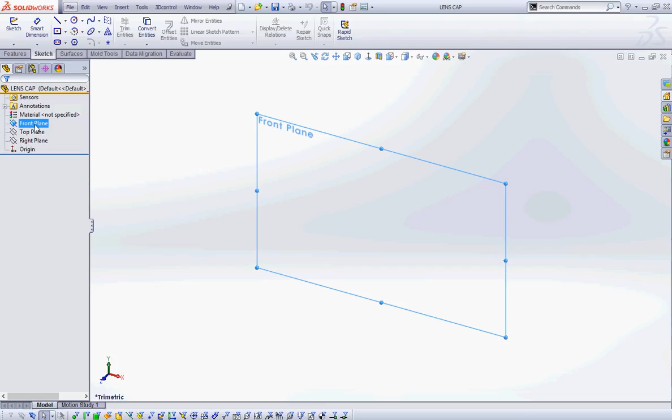Going to start with a circle, center point coincident with the origin. And the dimension is going to be 4.9.

Anybody lost, needing help? Anybody needing help at this point? Ron's sitting back there waiting for somebody to need his assistance. Don't worry, it's all good.

Okay, so now we're going to do an extruded boss base. We're moving over to features, doing an extruded boss base, but we're going to give it a draft so it looks kind of like a drum. I'm on the middle of page 5-22.

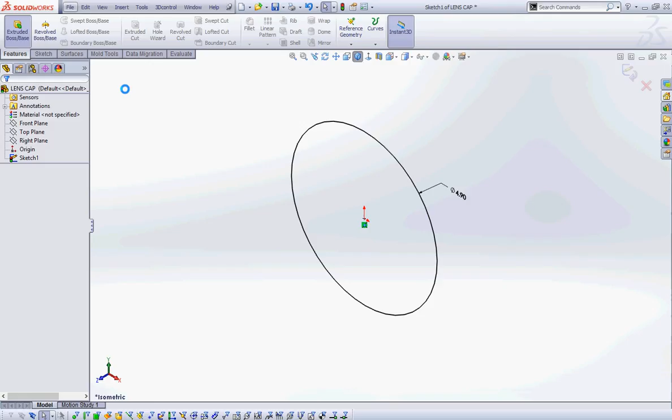Okay, so I'm going to extrude it 1.725. I'm going to add a draft. My draft is going to be 5 degrees. And I'm going to put a check right there where it says draft outward.

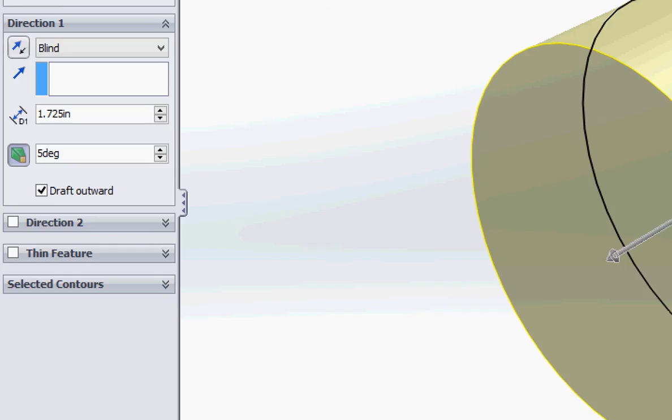Green check. Anybody lost? Needing help?

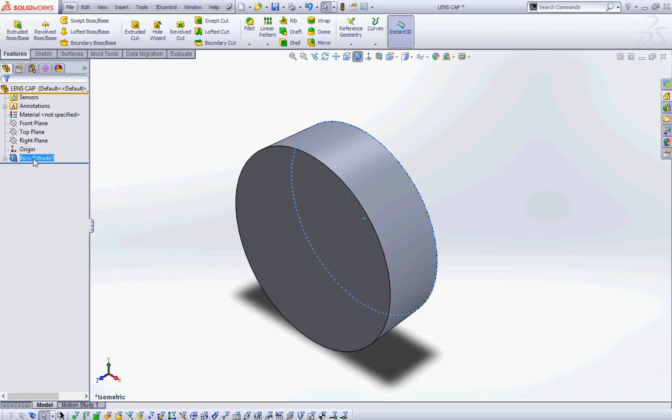Oh, I needed to reverse the direction. Sorry, I need to reverse the direction. I need to have it go toward the rear instead of the front. So I'm going to come over and edit the feature and change the direction right here, so that the small end is at the front and the bigger end is toward the rear.

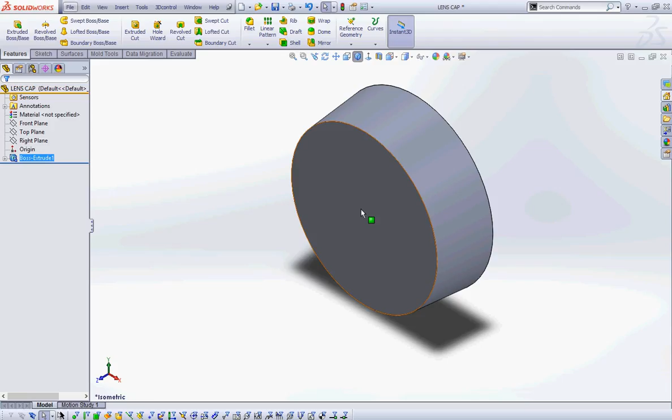Do you remember when we created the battery and we created kind of a well for the terminals? We're going to do the same thing here. We're going to select this front face for a new sketch, and we're going to do a circle.

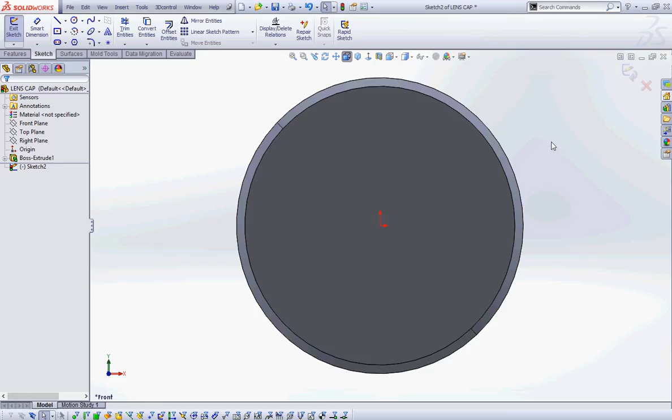And we're going to add a dimension of 3.875. Now some of you might be concerned because it says 3.88 instead of 3.875. That's because I only have 2 decimal places and it's going to round up. All right?

Anybody need help with the second sketch? Okay, moving over to features.

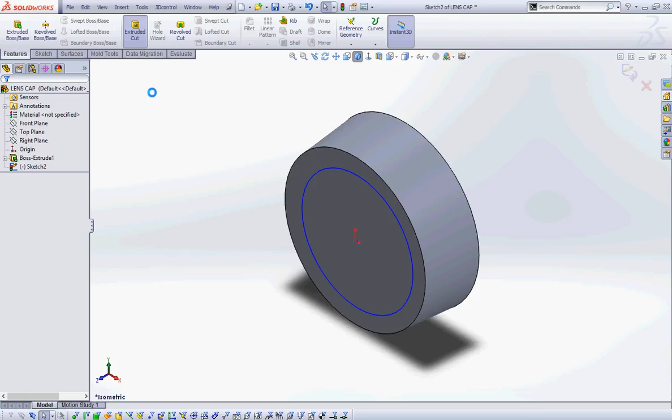We're going to do an extruded cut. We're going to make it 0.275. We're going to give it a draft of 5 degrees, but this time we're not going to draft outwards.

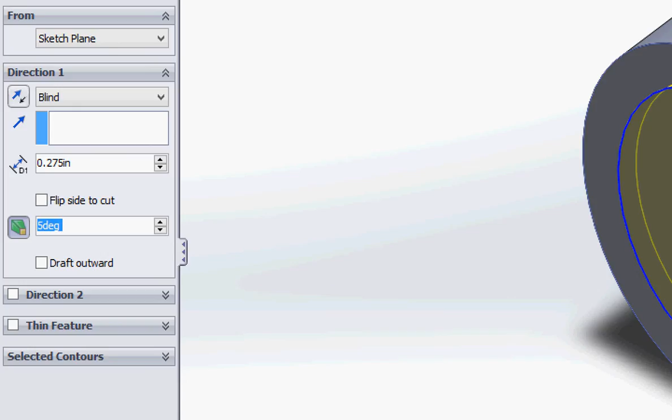Question? The draft outward, that's just the opposite direction of the draft, right? Right, and you're going to see that in a second.

I'm going to green check it, and then I'm going to give you a wireframe so you can see. So I'm switching to wireframe so you can take a look at it and see how it's drafting one direction and then the opposite direction for the cut. So this is a draft out, this is the draft in. See that?

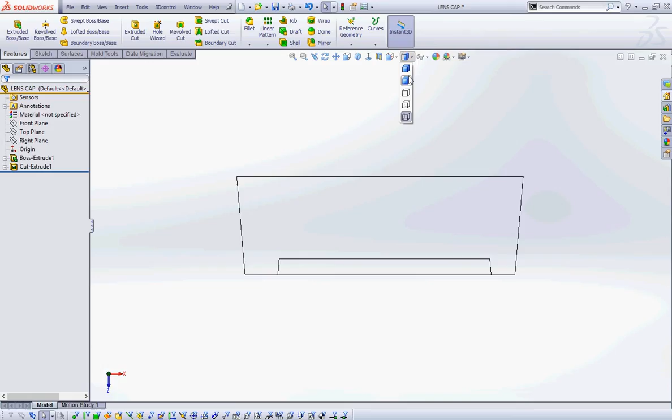Any questions? Okay, I'm going to save it.

So now we're going to add a shell, and we're going to remove this face. And remember, our shell is right here. So I'm going to click on shell. Our shell is going to be 0.150.

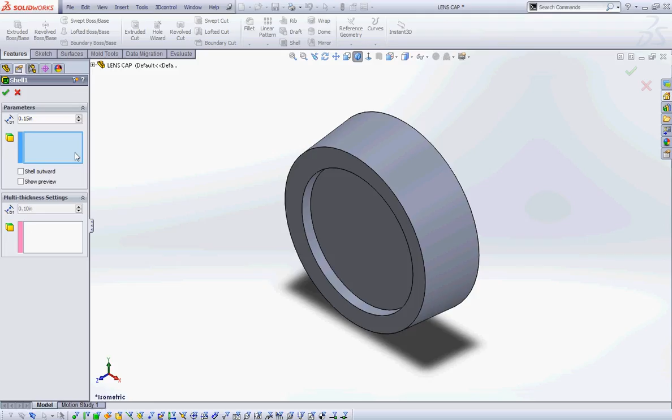And then we're going to remove this face here, where the well is, and we're also going to remove this back face. So you should have two faces here: one's the back face and one is the smaller circle where the well is, and then green check.

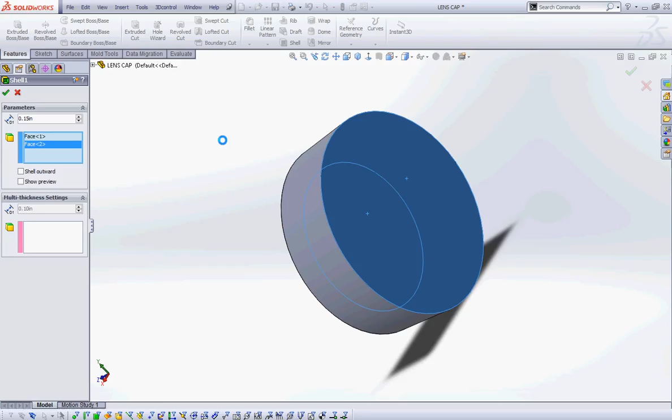And I'm going to show you again what it looks like with the wireframe, so you can see our O-ring is going to sit right in here. That O-ring we made.

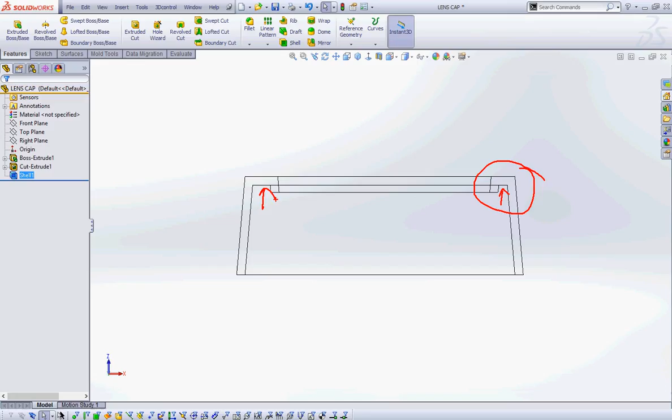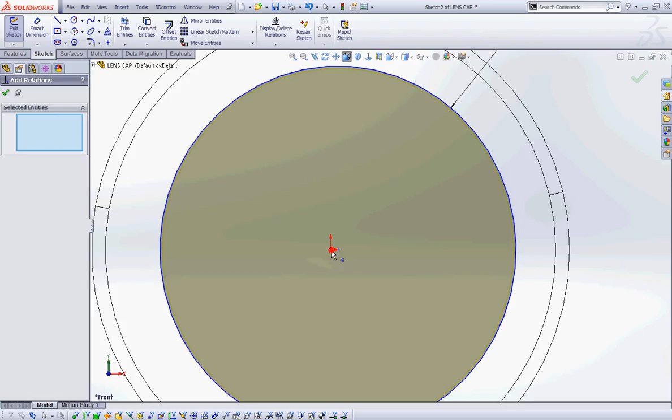It does. I'm wondering about that. Let me look at my cut. I agree, it looks off. Let's see. Aha! Looks like I'm missing a coincident constraint. Good thing I looked at it in wireframe so I could catch that error.

Now it looks correct. So our O-ring's going to sit right in here to seal our lens cap. And I'm going to save it. Was there anybody who was not able to create their shell?

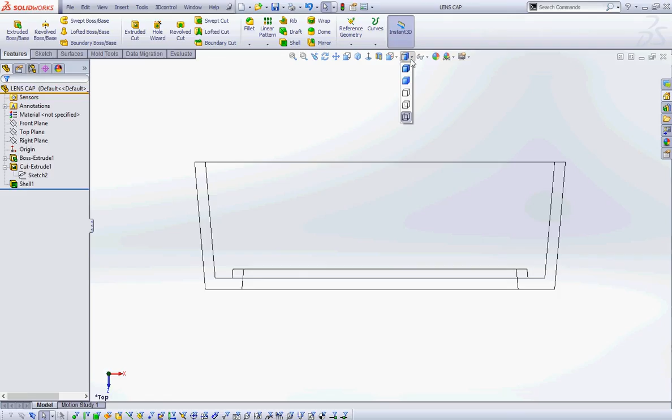Okay, so the next feature we're going to make is, you know how on bottle caps a lot of times you have like a little kind of lip to it, kind of dovetails? We're going to do the same thing. We're going to add a cut, revolve around this bottom that's going to kind of act as a lip, and it's going to kind of dovetail into the housing, okay?

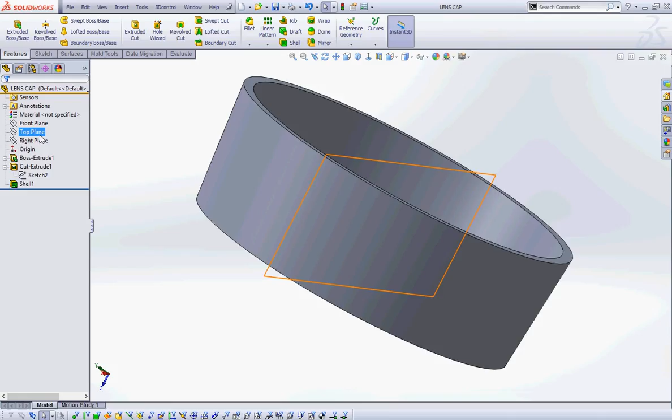So we're going to select the right plane for a new sketch, and I am on page 5-24.

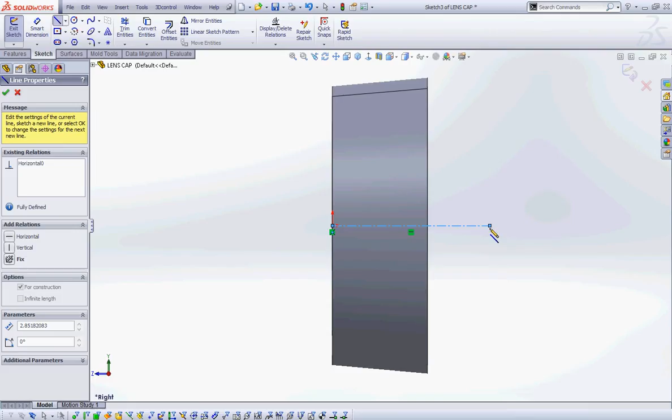And I'm going to start by placing a center line from the origin. I'm just drawing like a horizontal line, just like that. And then I'm going to select this top edge. See this top edge? And I'm going to go convert entities.

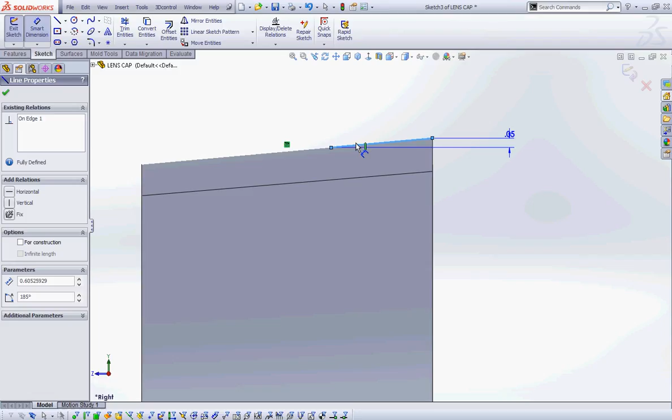Draw another line there - no. There's my aligned dimension, and I want it to be 0.25. How do you get to an aligned dimension?

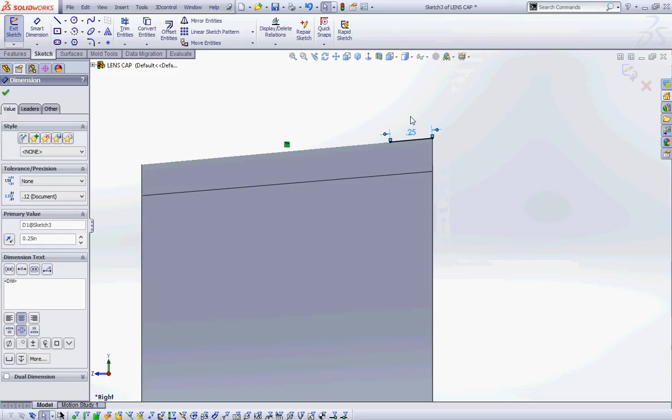Yeah, there are a couple different ways. If I right click on it, notice I should be able to select a line, but it's also just kind of clicking on it and getting it positioned. If you zoom in, it's a little bit easier to get it aligned.

Yeah, but you want to make sure that you use aligned and not horizontal or vertical. It's not letting me change the dimension.

Rather than click here, and then we'll see how you kind of - so select the endpoint, get out of the dimension. Right, select the endpoint, drag. Yeah, now you can change the size. So now you can select the dimension, click on it, now make sure, move it out close to the line. Yeah, there you go.

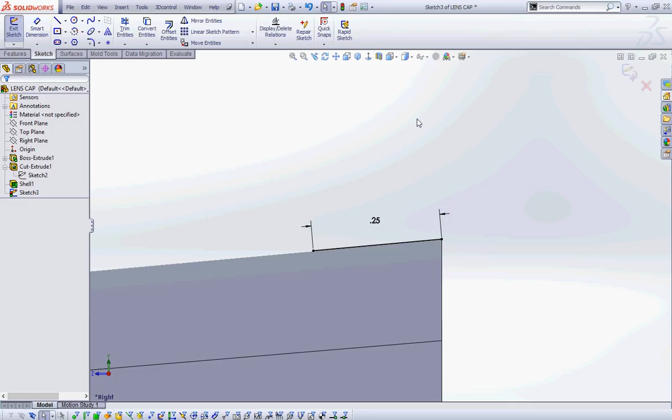So now what we're going to do is we're going to do a revolved cut. So we're going to come over to features, we're going to select the revolved cut. Because this isn't just a single line, it's an open line, what kind of feature is this going to be? Thank you - a thin feature. See, I have a TA who knows something.

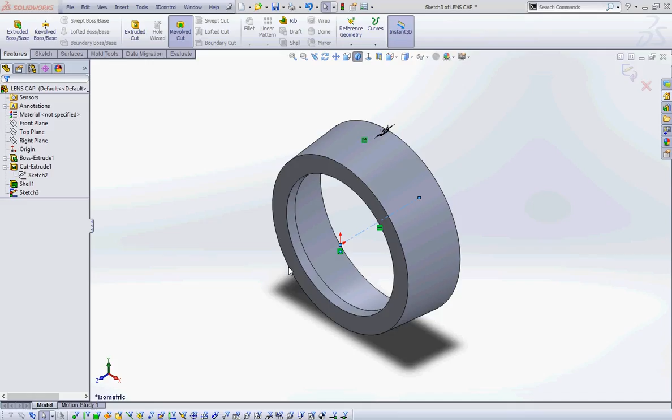Yeah, so I'm going to click on my revolved cut. It says, well, if you did not exit the sketch, you get this dialog. If you click yes, it's going to automatically close your line and it's going to mess up your feature. So you want to say no if you get that dialog. Okay? You want to select revolved cut. If you see this dialog that says the sketch is currently open, you want to press no, because otherwise it will automatically add lines to create a closed polygon.

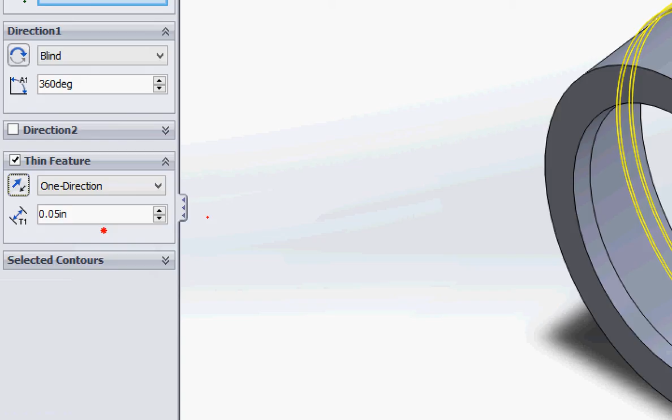We want it blind 360 degrees. We want the thickness to be 0.05. And we want to reverse the direction so it's going into the part, not out of the part. Okay? So you want to click on this to make sure that it's going into the part.

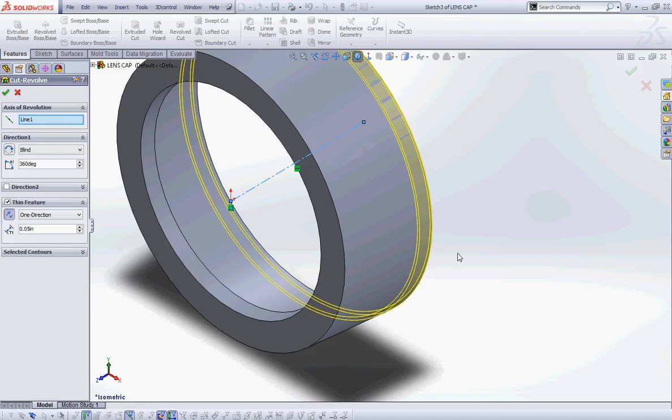Okay, I'm going to switch to... see how it's going into the part. Okay, so you want to see it go cutting into the part, not coming out of the part, and then you're going to green check.

I'm going to call this lip. And I'm going to save it. Okay, was everybody able to create the lip? Does anybody need help?

Now we're going on page 5-26. We're going to create a thread. Now if you look at like a bottle cap, you'll notice that the thread does not start right at the bottom of the bottle cap. It always comes in a little bit. That's so there's kind of a lead, so it's going to create a better seal. So we want to put a plane into the part a little bit to the start point for our thread. Does that make sense? Okay, even if you look at a screw, the thread for the screw isn't right at the bottom, it's usually in a little bit. Otherwise the thread gets stripped.

Okay, so what we're going to do is we're going to add a thread plane. We're going to select this lip right here, and we're going to offset a plane into the part just a little bit. So we're going to select the plane tool on the ribbon. Which lip did you select? I haven't selected anything yet, I just selected the plane tool.

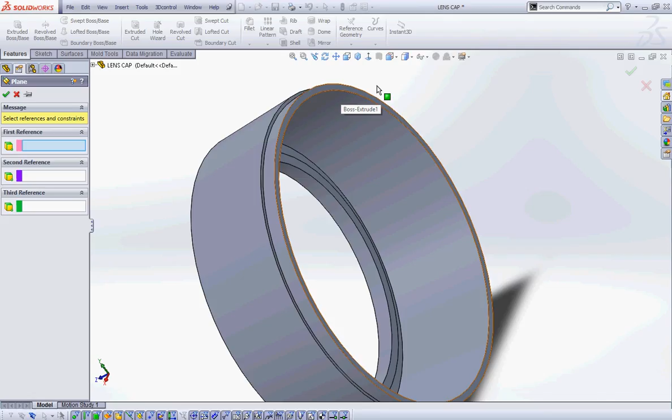And we're going to be selecting, see this face right here, this small face where the lip is on the end? Okay, so we're going to select, see how I selected that face? And we want it to offset into the part, we want it to go in 0.45.

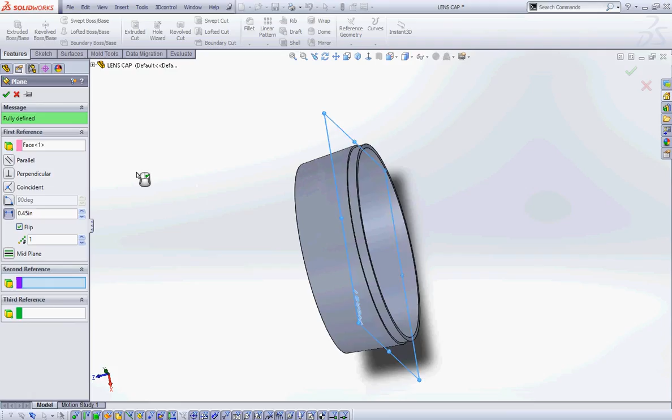And notice mine is outside the part. I want it to go into this part. So I click on this flip, and that brings it into the part. Notice how the plane is before that revolved cut. Do you see that? And then we're going to green check. And that's going to be the thread plane.

Okay, I'm going to save it. Anybody who is not able to create the thread plane, raise your hand.

Miles is having some problems. First time tonight, Bill. First time tonight, that's okay.

All right, so we're going to be creating a sweep. How many sketches does a sweep have? 2. What are they called? Profile and path. Alex, ding, ding, ding. Alex got it. Tom got it. Okay, profile and path. So we're going to create our path first. Our path is going to be a helical curve. I'm on page 5-27.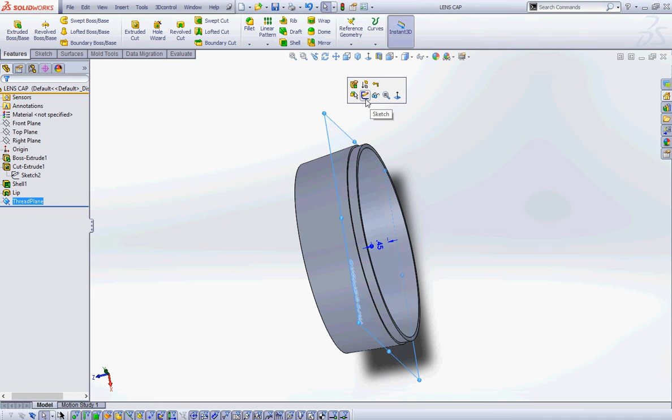Okay? I'm going to select the thread plane for a new sketch. So I'm going to select that offset plane, and I'm going to say new sketch. And then I'm going to select this inside circle, this inside edge, and use convert entities to copy that edge, that inside edge, to my thread plane.

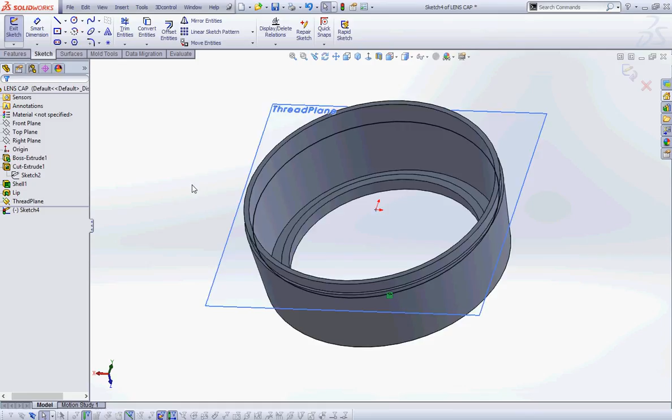So I'm going to say convert entities, and then I'm going to select this inside edge and green check. And notice I get that circle copied right here onto the plane. Do you see that? Was everybody able to copy their circle onto the thread plane using convert entities?

Question? You showed we click on what you converted. I started a new sketch on the thread plane, and then I selected this inside edge that's on the lip. So this circle right here. Got it? All right. So we've got that circle. That circle basically tells us what the diameter is going to be for our helical curve.

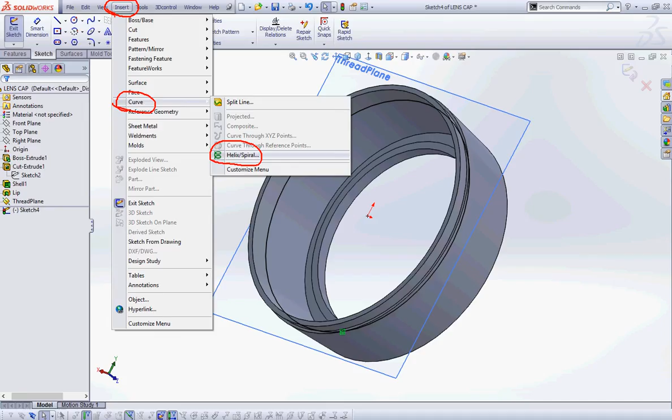Now to place our helical curve, we're going to go insert, curve, helix spiral. Everybody able to find it? So you're going to go insert, curve, helix spiral. And we've got a bunch of choices here. If you look at the drop down, we've got pitch and revolution, height and revolution, height and pitch, and spiral.

Pitch and revolution. Pitch is the distance between the turns. Revolution is the number of turns. If we have height and revolution, that's the distance between the first turn and the second turn. And then the revolution's the number of turns. So it kind of does math. It says, oh, okay, if you have this many turns over this distance, that's going to be your pitch.

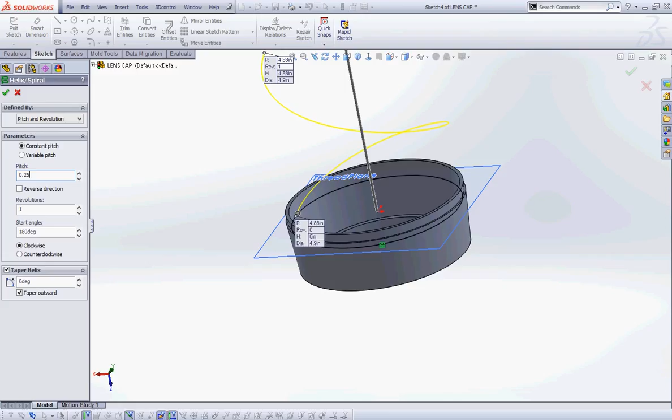And then height and pitch. Height's going to be your overall height, and pitch is going to be the distance between your turns. And again, it does math to calculate how many turns it's going to be. We're going to select pitch and revolution. We're going to say the pitch is going to be 0.25. So we're going to have a quarter thread. We're going to reverse direction, and we're going to say we're going to have 2.5 turns, and we're going to set our start angle to 0 degrees.

Okay, and a lot of people say, what does that mean, the start angle? If you look at, we selected this as our thread plane, right? So if we have this imaginary plane across it, notice that the start and end point of our curve is going to be at 0 to the perpendicular plane. Do you understand what I just said?

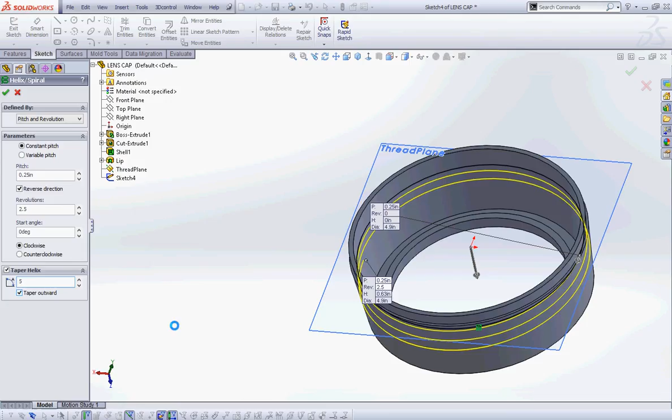Okay, so let me turn on the visibility of the top plane. See that top plane? See how at 0 that end point is coincident to that top plane? So that's what that angle has to do, is just where this end point's going to be. That's what the start angle is. Okay? And then we need to taper it, because we've got it tapered outside. So we're going to taper it 5 degrees, and we're going to uncheck taper outward.

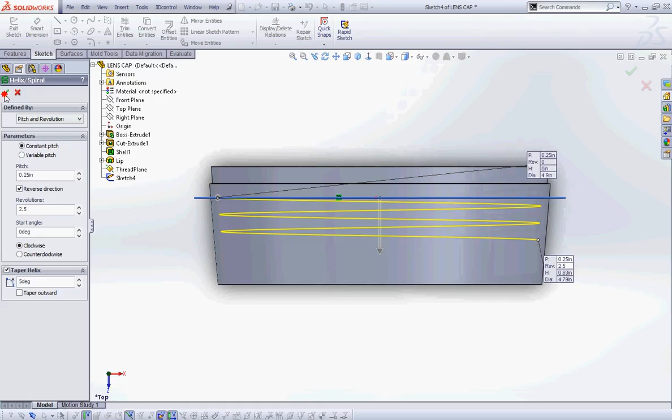And I'm going to switch to a view so you can kind of see how it's tapering with the lens cap. Okay? So you should see it tapered. And then you're going to green check. And that's going to be our thread path. So I'm going to rename that thread path.

And I'm going to save it. Alright. Now in the book, she gives the most convoluted way of creating the profile for the thread. It's really, really hard to understand.

Okay, so I'm going to draw the sketch on the board, and then I'm going to do it on the screen. But basically, you're going to be drawing a trapezoid on its side. Y'all know what a trapezoid looks like, right? Okay, so there's a trapezoid on its side. It's got a center line with the endpoints coincident to the midpoint on both sides. This side is equal to this distance.

So this is going to be 0.06, and the distance from here to here is going to be 0.06. And this is going to be 0.03. And then these two sides are equal. Everybody with me so far? Yes. Should we draw that? Yeah, that's what we're going to draw.

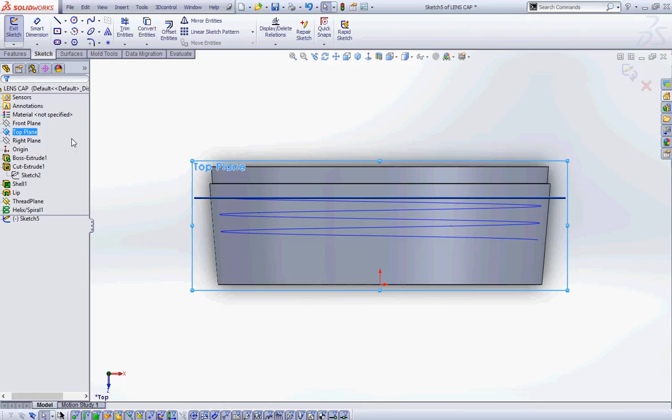So in the book, she makes it really, really complicated. This is basically what she's trying to get at. So, that is going to go on the top view, top plane. And then I'm just going to draw it out here.

And notice, I'm not going to worry about the size too much because once I add my dimensions, it's going to change, right? And then I'm going to add a center line like that. I want that to be horizontal. I want these two to be equal, right? This is going to be 0.06. This is going to be 0.03.

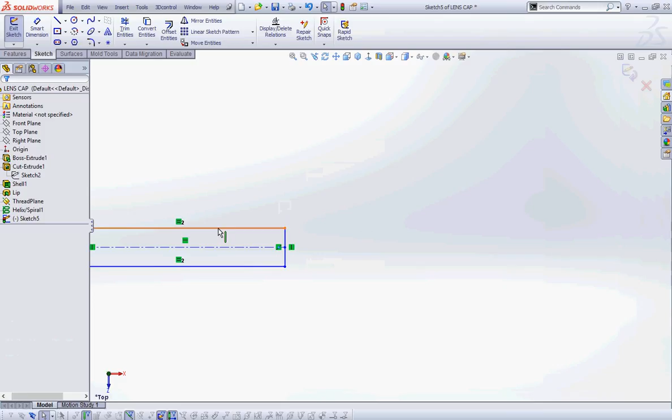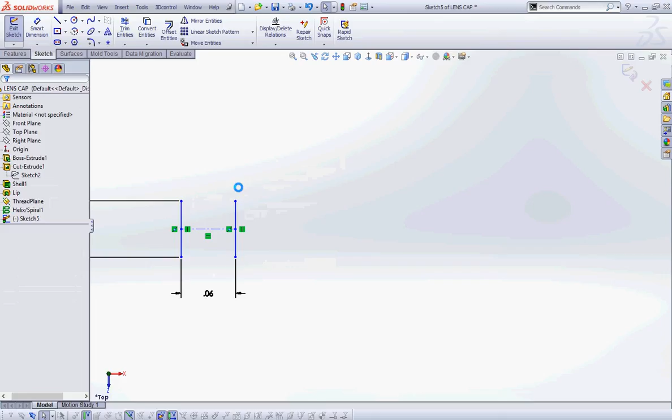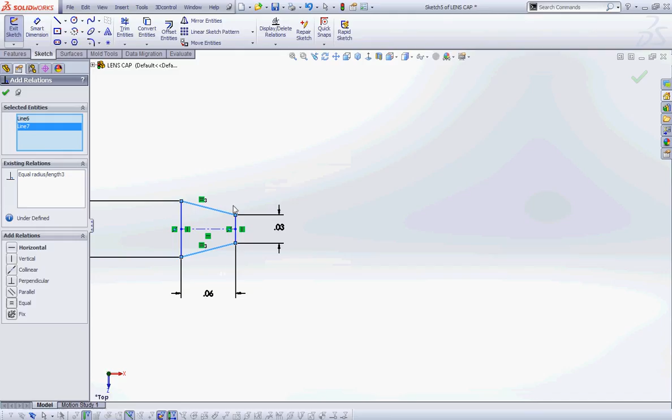Yeah. Okay. Okay, and I'm trying to get it so that, there we go. You broke it. So this is what it should look like when you're done. Okay. Everybody good? Not yet?

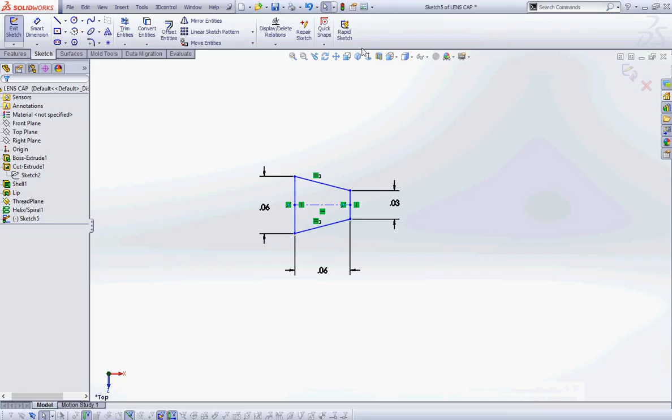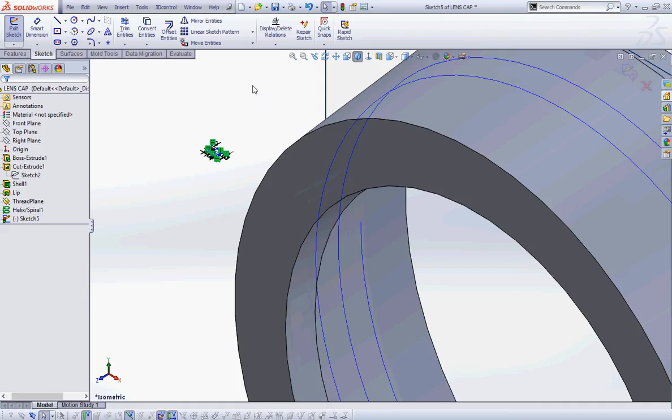Okay, now the thing is we want that profile to be on our path. And we want this endpoint here to be coincident with this endpoint here. So we're going to use the pierce. Remember we used that pierce before? So we're going to add a relationship, and I'm going to select this endpoint here, and I'm going to select this curve, and I'm going to say pierce.

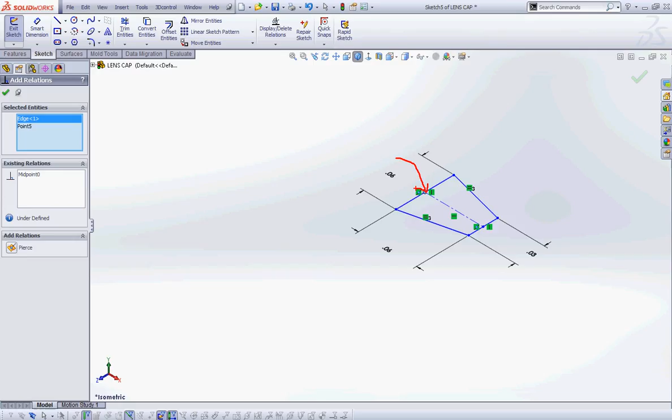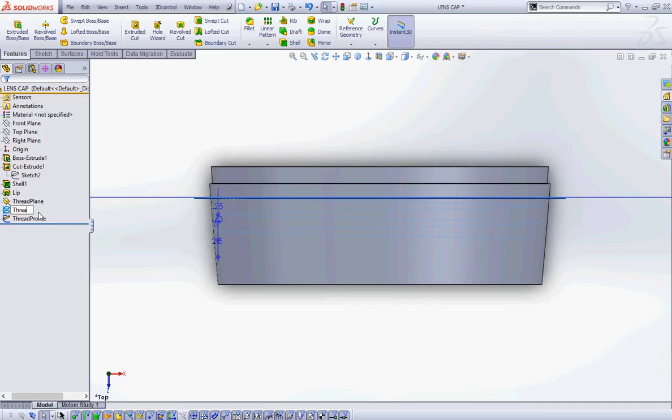The one on the fat end, the one on the 0.06 side. And I'm going to say pierce. Okay, and notice how it falls on. See that? So it's facing toward the center of the part. And then I'm going to green check. I'm going to exit my sketch. I'm going to call this thread profile. And that curve is my thread path.

Okay, so this is what it looks like. Who's lost, needing help? Okay, so we need to accept this work. So clear yourself, and then now you need to add a dimension. Let's make that one first. Click on dimension. Click on here. Click on here. Click on 3. And then double click on that 3 for the dimension. Make that 0.06.

And then select this line, or actually if you select the center line, you can come down. Click, make it 0.06. Alright, and now you're gonna click on relation and select this center line right here. Zoom out. Select the curve. Yeah, select it. Say pierce. You should see it. See how it's facing inside. So you have to go add, select it, and then zoom out.

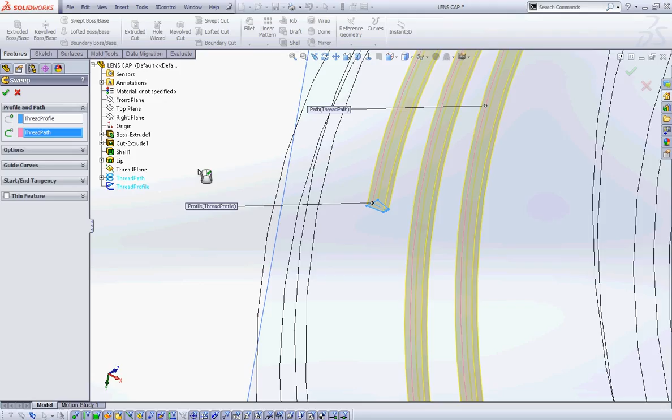Everybody hear me? Everybody's got it. That's awesome. Okay, so we've got a path, we've got a profile. We're exiting out of the sketch. And now we're going to do a sweep. Select sweep. It asks us for the profile. This is where it's helpful that you've named it thread profile, and then it asks for the path. Select the path and green check.

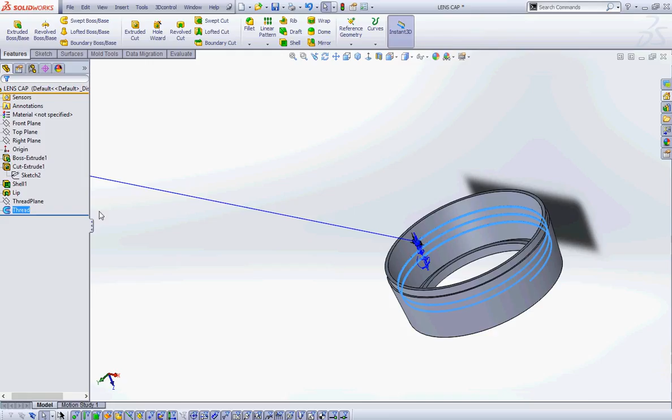And there is your thread. See that? And I'm going to call this thread. Correct. Because it's got a draft. See that? And I'm going to save it.

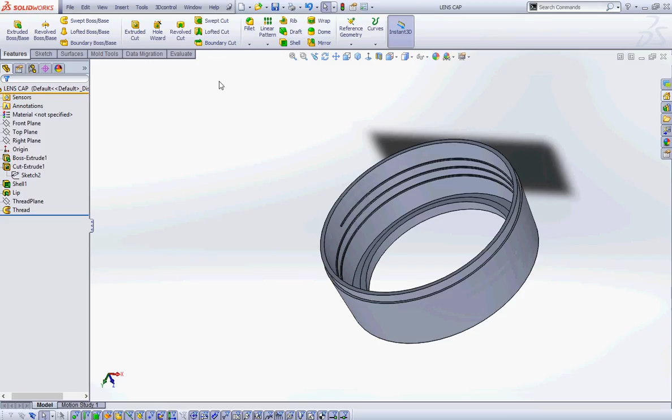Okay. Questions? Lena, are you okay? I'm just looking at this one, is that gonna be enough depth because we went by the OD and it's larger? Yeah. Well, in the book she made it bigger, but I just, yeah. Okay. So here's a couple things.

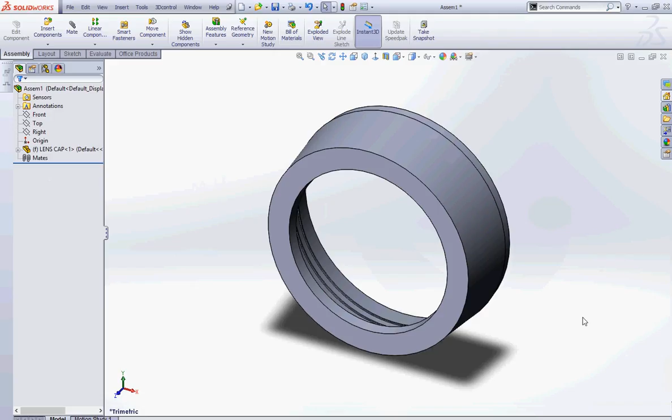I wanna show you a few things that are not in the book. I wanna create an assembly with my LensCap. Oops. So here's my LensCap. I put it into an assembly. And what I want to do is I'm going to bring in my O-ring. Here's my O-ring. Okay, so how do I get that O-ring into my LensCap?

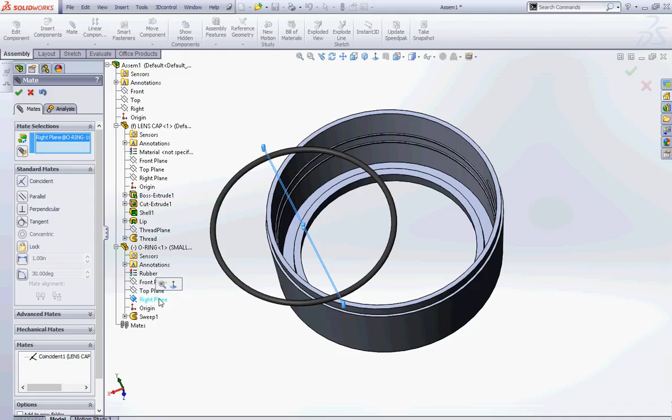All right, so what I'm going to do is I'm going to do a mate between the top plane of my LensCap and the top plane of my O-ring, okay? And the right plane of my O-ring and the right plane of my LensCap. See how that centers it in there? Okay, but now the question is, how do I get it so that it's tangent to the bottom?

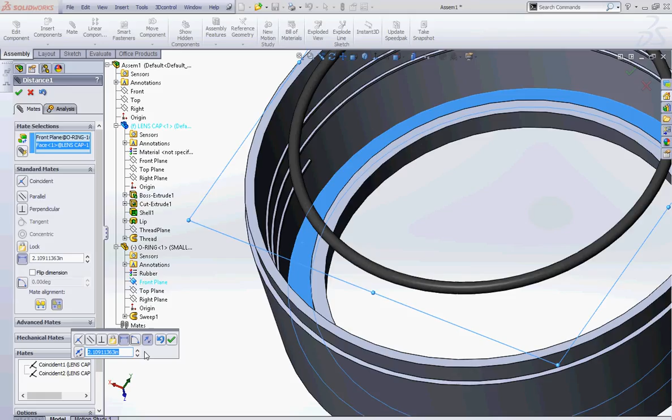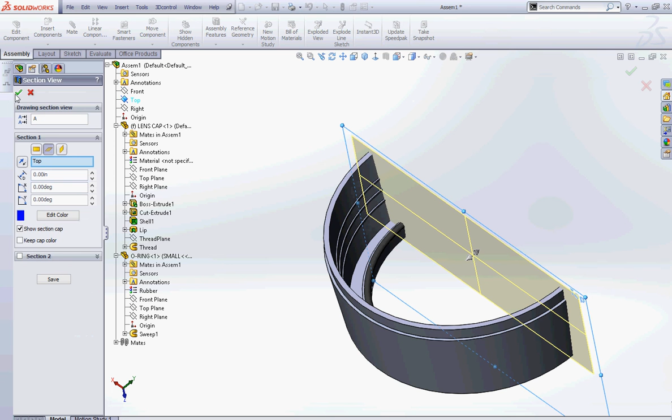What I can do is I can say from the front plane of the O-ring and this face right here, and then say I want a distance, and that distance is going to be equal to the diameter or the radius of the O-ring. So I'm going to just put in 0.125 for now. Okay. Now I want you to notice I'm going to do a section of my assembly so you can see where my O-ring is.

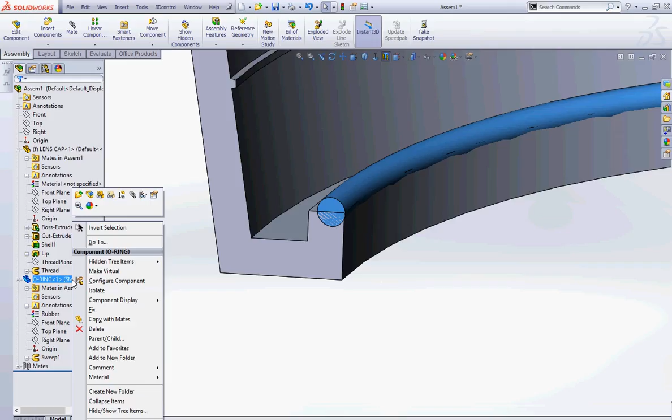See that? My O-ring's not sitting right. Remember, this O-ring has configurations, it has different sizes. So I need to figure out what size to use. Right now it's using small. If I come over and I say, okay, let's see what it looks like with the medium. Okay, well the medium's too big. So I need to add a size that's just for the LensCap. Okay, so how do I determine that size?

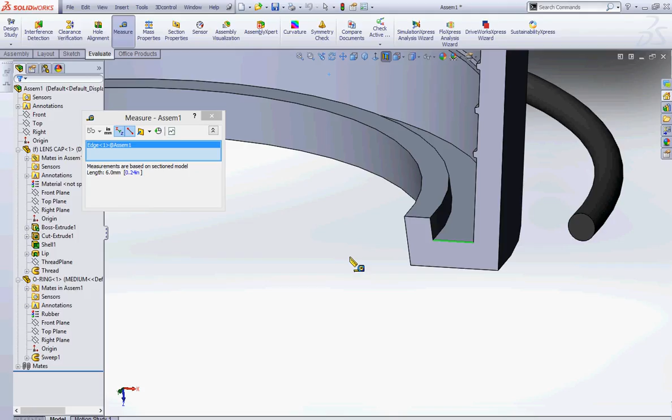I'm going to come over to evaluate, and I'm going to do a measure from this point to this point, and the distance is 105.6 millimeters. And then I'm going to do a distance just of that edge, and that edge is 6 millimeters. So it's like 108 millimeters is going to be the diameter that I want. So I'm going to come over to the O-ring. I'm going to open it up, and I'm going to open up the table, edit the table.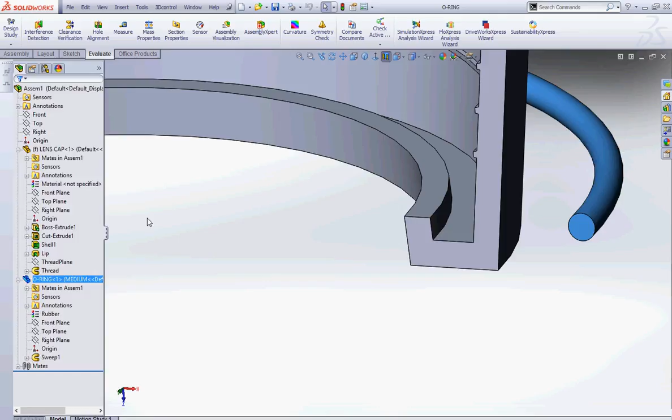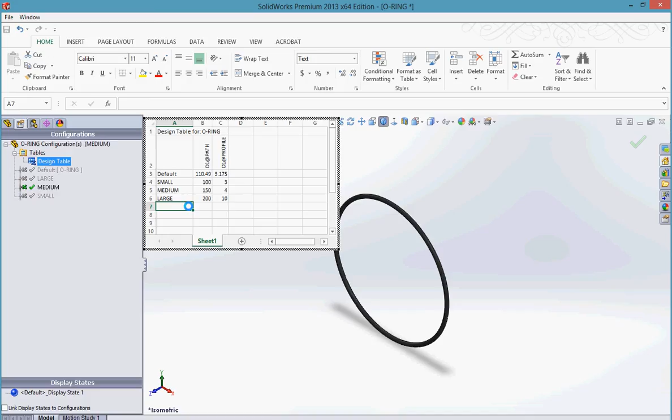And I'm going to add another size, and I'm going to call this size LensCap. Trying to find my sizes. Okay.

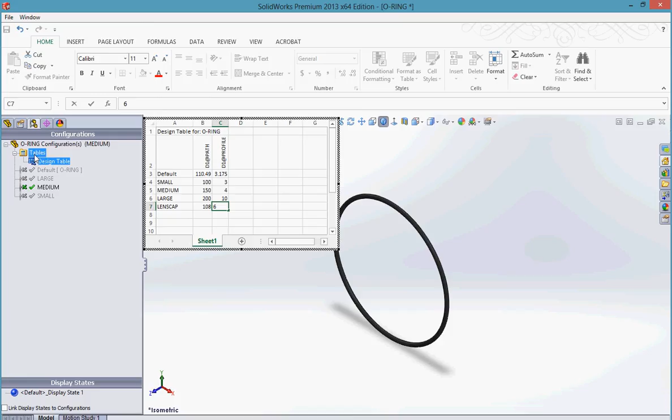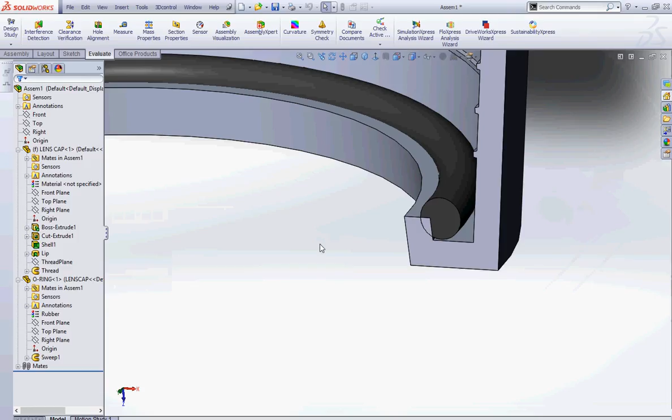So I'm going to add a size called LensCap. The diameter of the path is going to be 108 millimeters. And I'm going to make the diameter 6 millimeters. So I have now added a new configuration called LensCap. So now if I go to my assembly, I can configure the O-ring to LensCap. See how it fits in there?

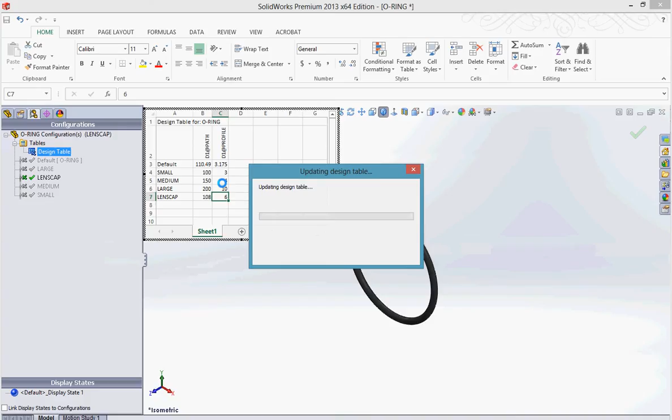Now I see that maybe I want to adjust that diameter a little bit more. And I'll say I want it to be 108.5. And save it. And now it's looking a little bit better.

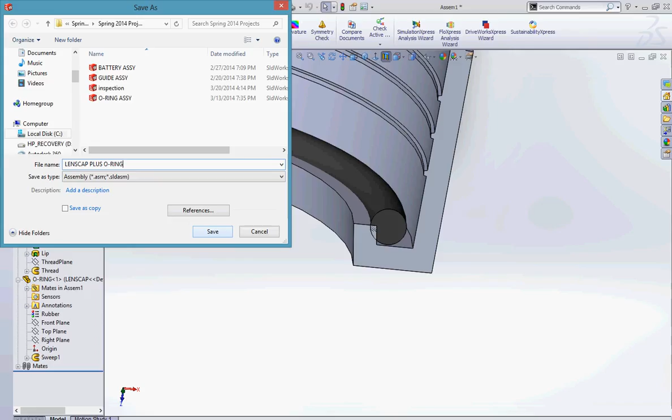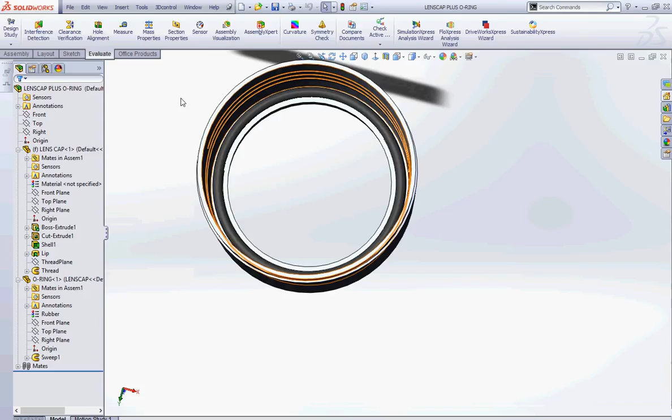You can see how I can modify my table so I can get my LensCap to fit in there and getting it to look pretty good. See that? Alright, so that's one thing I want you to keep in mind when you're assembling. The other assembly I want you to look at is this LensCap is going to be in an assembly with the lens. And the lens is going to be in an assembly with the bulb.

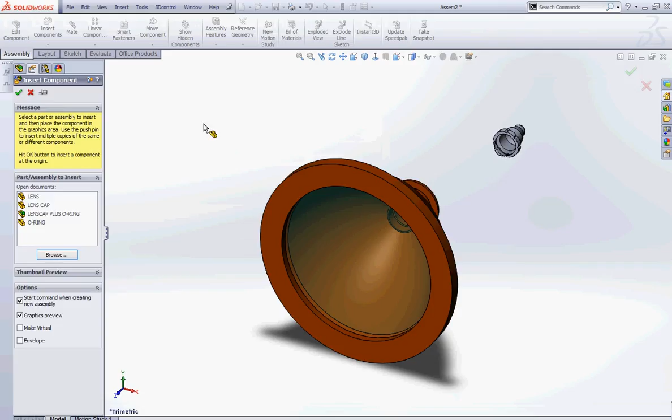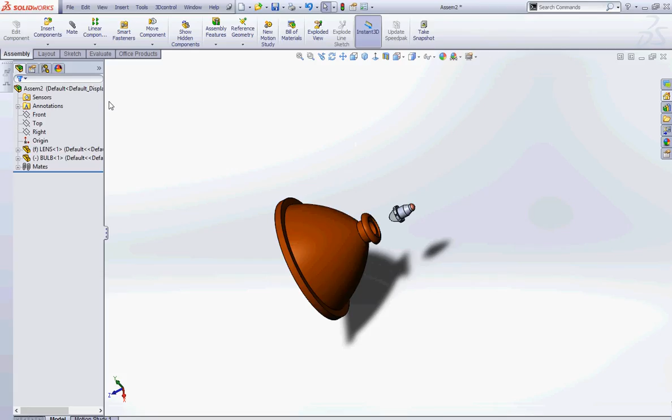So I'm going to add the bulb to this assembly, and I want to show you the best way to assemble the lens with the bulb. What I want to do is I start by adding a concentric mate between this face and this face. And I want this bulb to sit in that counterbore hole that we created. So what I'm going to do is, I'm going to create a section. And notice now I can kind of see the faces a little bit better.

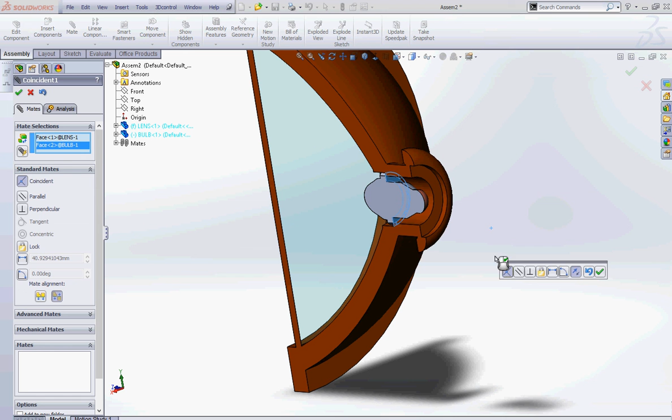So now I can do a coincident between this face and that face to seat that bulb in there just right. See that? Okay? That's really hard to do if you're not in a section view. Okay? Where's the selection for a section? You select your plane and then select right here for section. Oh, okay. And then to unsection it, you just toggle it. So you just click it.

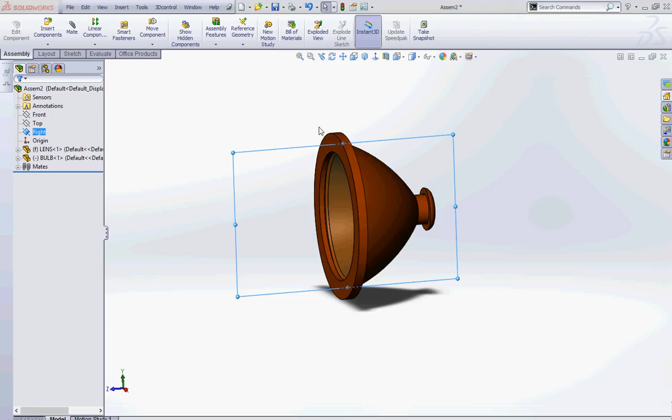Okay? So those are two things you need to be aware of as you start creating your documentation. And on Thursday, we're going to start working on our final part for our flashlight assembly, which is the housing. Okay? And we're in lab.

How do you turn the light bulb on?